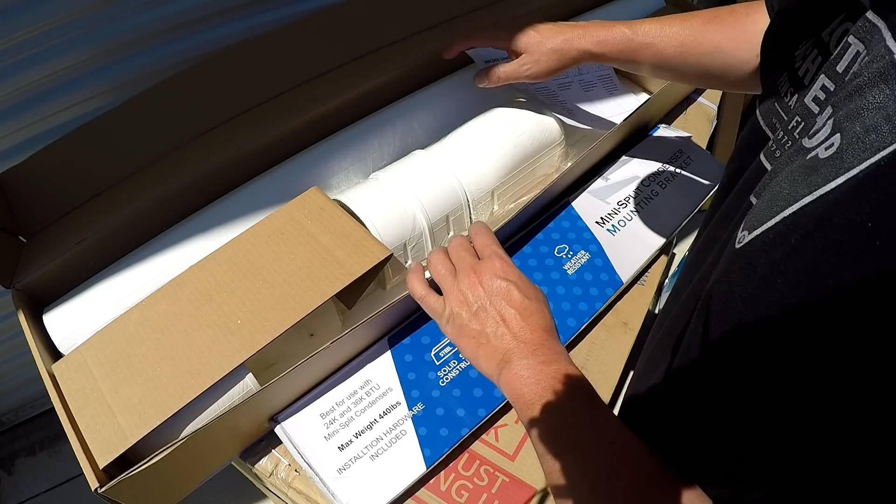All right, so let's go in here and check it out. So this is one of the pieces of the puzzle right here, the protective line kit. So this is a plastic kit that covers up the lines as they come out of the wall. Because of this kit right here, this may determine where I end up putting this outside unit on the wall. Got a couple 90s, so I'll look over these instructions. Well, this gives you all of your install instructions on how to properly put these guards on.

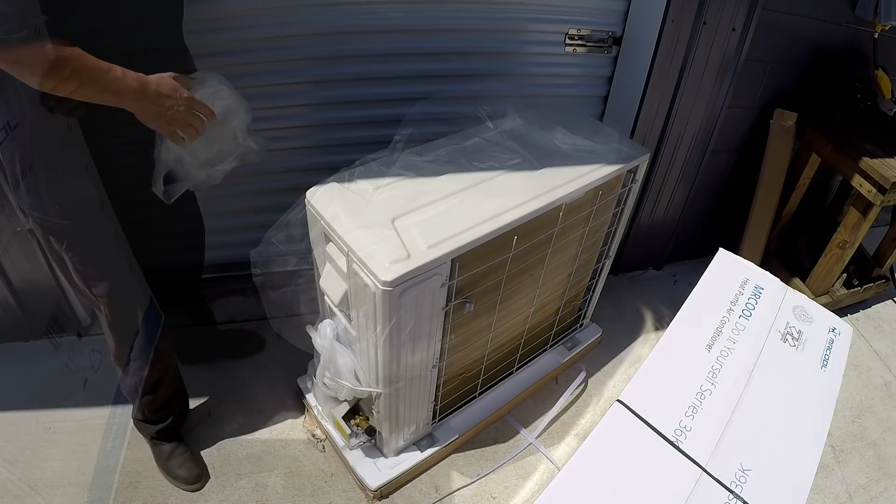All right, and then this is your condenser mounting brackets that I was talking about. These are the ones that are going to get mounted onto the wall outside, and then the condenser itself will sit on these brackets and keep it up off the ground. All right. It's a lot bigger than what I was picturing, but we went with the 36K, which was a big unit.

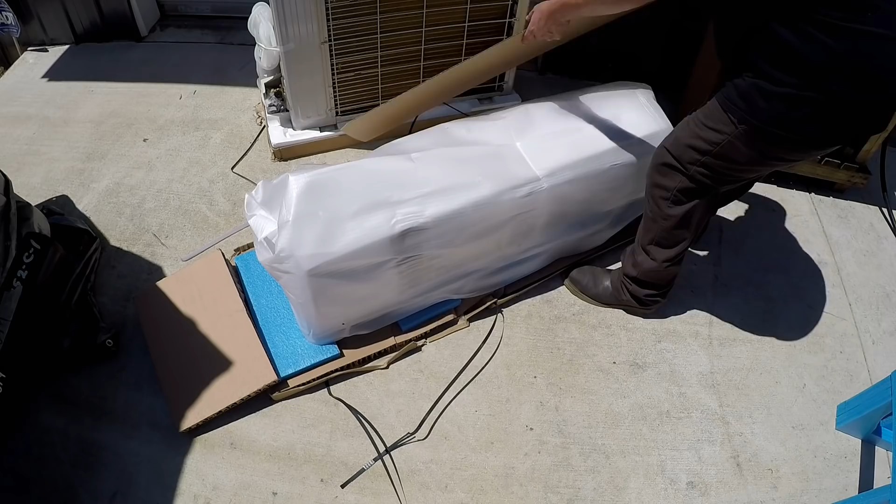All right, so this is going to be our template that we'll have to use on the wall for drilling our hole pattern, I believe, whenever we go to mount the bracket that hangs this system right here. This is the blower. So this is our template. We got to save this.

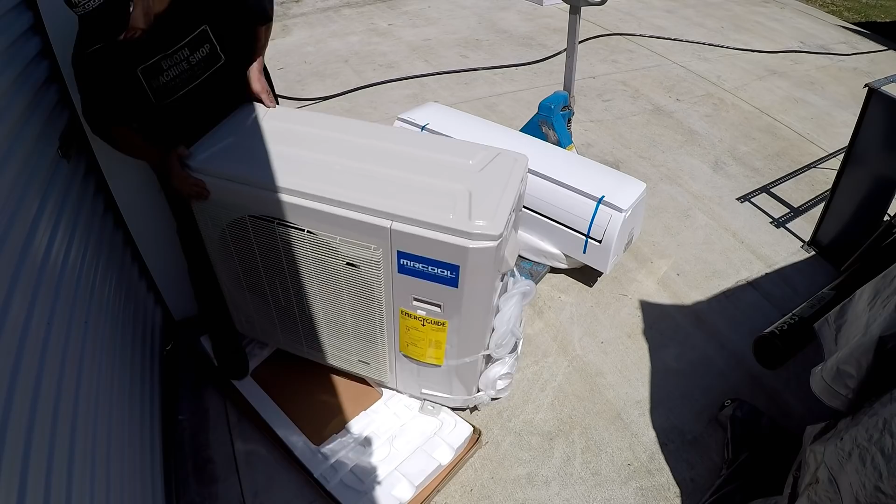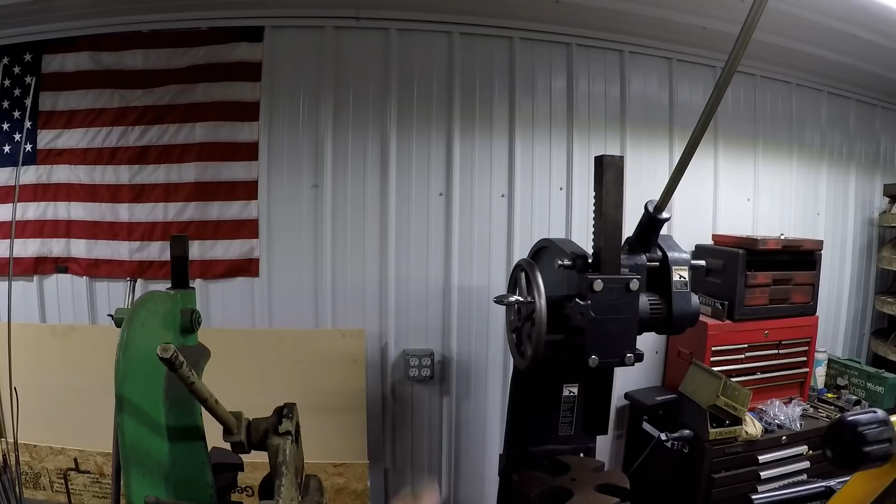Cool installed. All right, my breaker panel's right there, so we're going to tap into this and run a new circuit down the wall. And so this is a 50-foot wall down this side, and we're going to go approximately halfway down, which is going to be right about here where the Dake press is, right about in line, somewhere right here. We'll measure it out, it's going to be the halfway point, 25 foot.

So our blower unit, our fan, is going to be mounted right up here. We'll tuck it as far up as we can into this section right about here, and then we'll have to drill through the wall. I believe it's on the right side. We'll have to go through the wall to the outside. That's where the lines go.

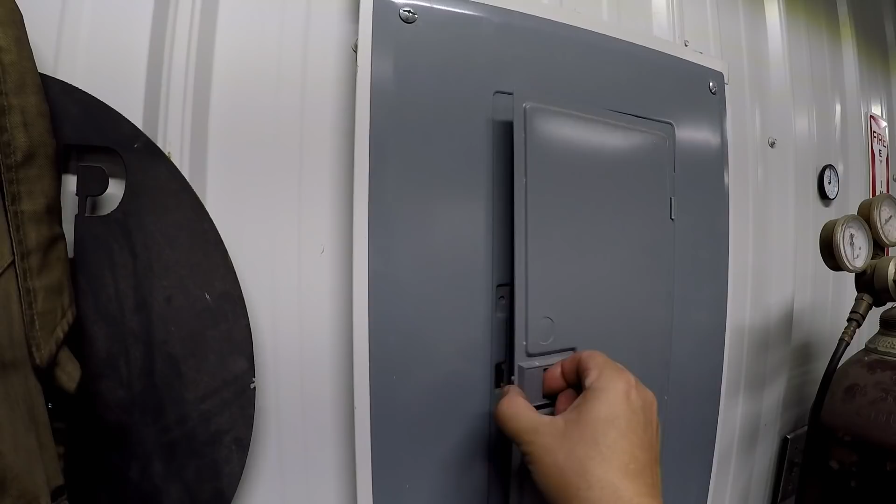All right, coming over here to the breaker. You can see we still got plenty of room, so we'll probably put the breaker in here somewhere. I believe it's going to be a 30 amp. We have to check, but I believe it's going to be a 30 amp breaker for a 240 volt.

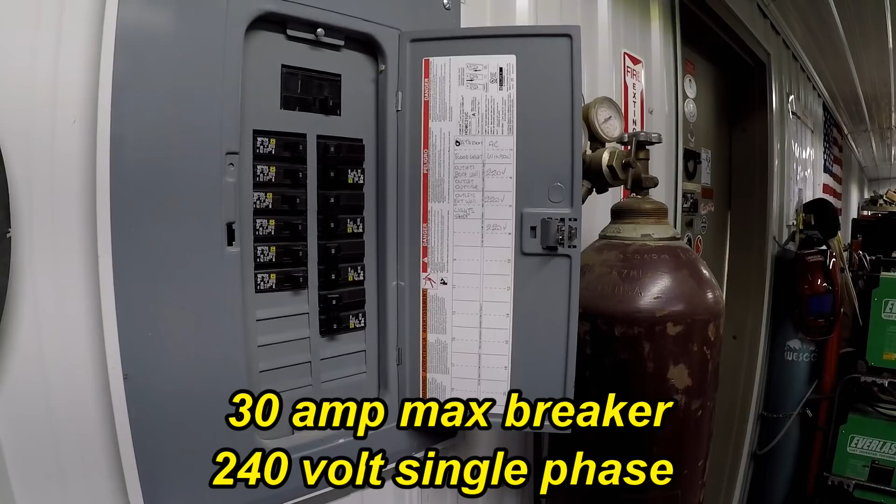And this is where I'm talking about you may have to hire a professional hand to come in and help you make sure that the proper breaker is installed and make sure that the proper circuit is installed and ran correctly so that you can plug the unit in.

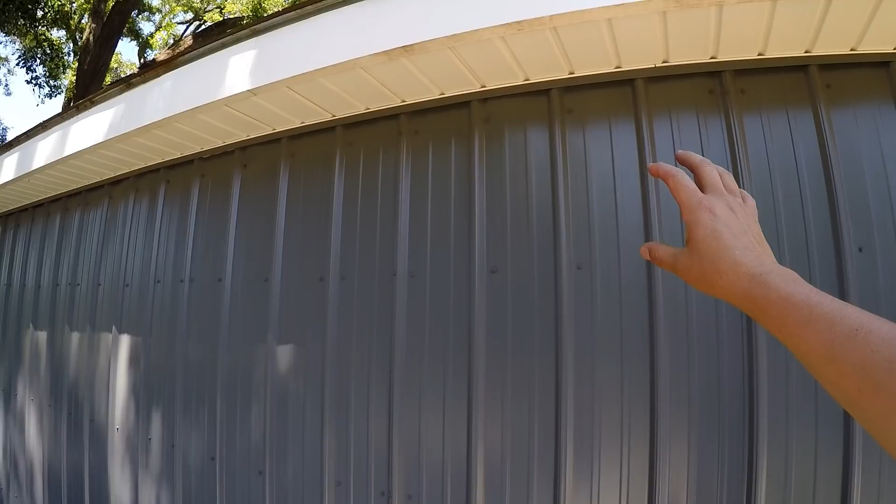So I believe the plan for Fernando is that he's going to come through the wall and he'll run the conduit up. We'll run it along the top corner there, down the wall, wherever we measure this out, we still got to measure it. And the condenser is going to be in this area somewhere right in here. I want it kind of hidden. This is the other slab where my garage is going to end up going, and I want it kind of hidden behind the garage when you're looking at this side of the shop here.

So the kit did come with the wall brackets. It's got two L-shaped brackets that we will mount on the wall, and the condenser will sit there on the brackets, keeping it up off the ground, keeping the dirt and the leaves and everything up off of it. So it'll mount right about in this area here somewhere.

So today's the day that we're going to get the Mr. Cool unit installed. I've got the template hung right up there on the wall. This is where the blower unit is going to sit, and we're going to start marking out a hole where we got to do some drilling.

So I actually have Fernando and his helper Tim here today. They're giving me a hand with this, and Fernando is an electrician and he actually does ACs for a living, so he knows how to do this stuff properly. But as I said before, this is a unit that anybody can install, but you may have to have some help with the electrical circuit, which is what Fernando is helping me with. But since they're here, it's going to be easier to have a couple extra sets of hands to put this kind of stuff up on the wall. But we're going to show you how all this goes, okay?

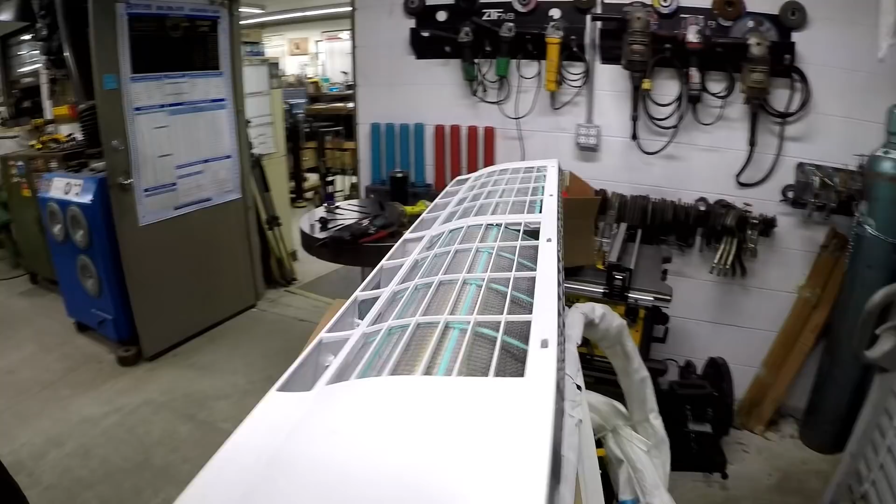So there's the unit down there. They've been checking it out, seeing what we got to do to get it hung. There's a look at the back of the unit there. These are the lines. So we figured out that we're going to have to drill our hole through the wall on this side. If you're looking at the panel, it's going to be on the left side. So we're going to do our drilling on that side right there, okay? And then this is the hanger bracket right here that mounts to the back of the unit.

And so they're working on a new circuit right now. You can see right there, they're going to be running a circuit out of this panel and going down the wall to power this unit up. And this is what I really needed help with, because I'm not an electrician. So this is Fernando's forte right here. All right, so we want to put a mark on the wall.

And by the way, this blower unit right here is halfway down my shop. So we got a 50-foot span of shop right here, and we're going to put it right in the middle, and the condenser unit will be on the other side of the wall outside.

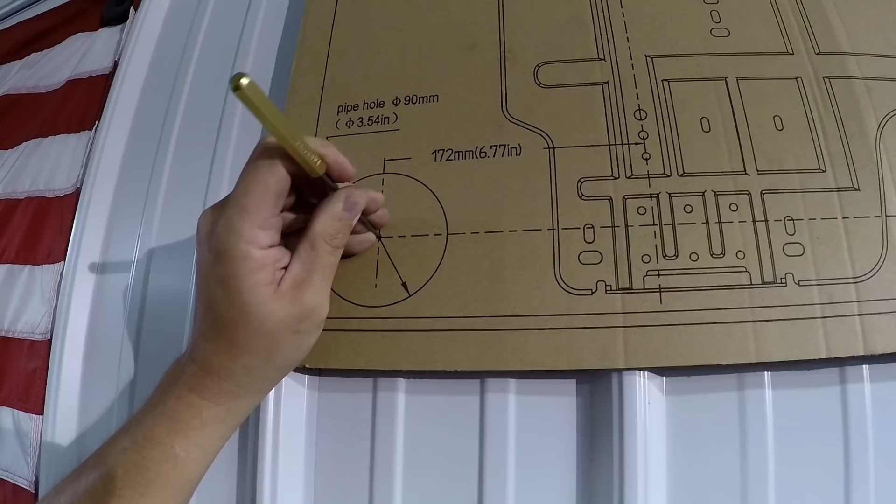So I'm going to take my ice pick here, my handy Duresta ice pick. This is going to be our hole for our coolant lines. This is the template, so you got to have a 3.5 inch hole saw. So I'm just going to go ahead and mark it. I'm going to go through right there, and I'm going to put a scratch right there on the wall. Just put a little scratch on the paint, and then we'll take a punch and actually punch that.

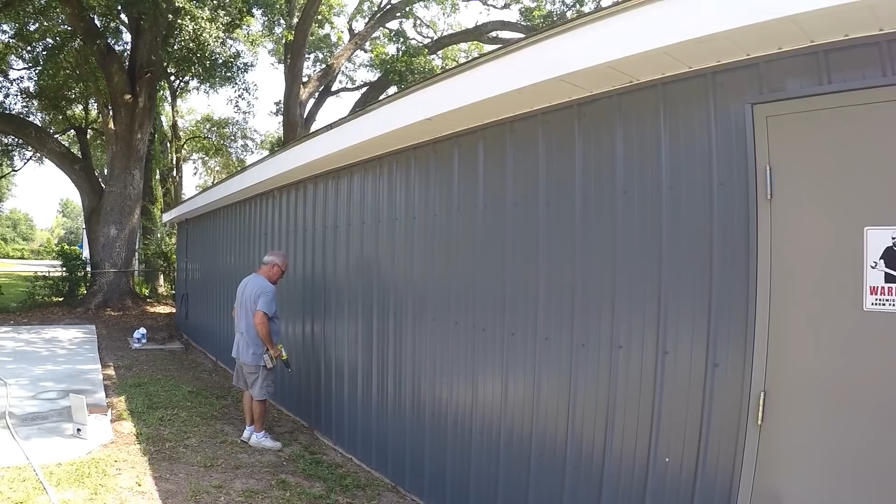So we got Fernando here. He's giving me a hand. He's getting ready to put a bend in that PVC right there. We got Tim here helping us as well. He's marking out some locations where we're going to be working down there to put our electrical system and our brackets to hang the condenser.

So is that a pilot hole? Yes, that's a pilot hole. That's so you can mark the outside wall there with where your hole is going to be? Yes, and it'll give us the center for our 3.5-inch hole here too.

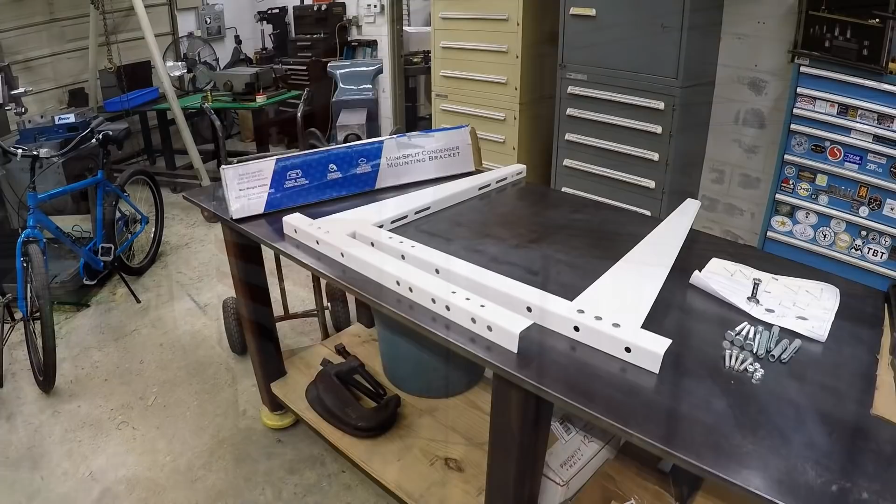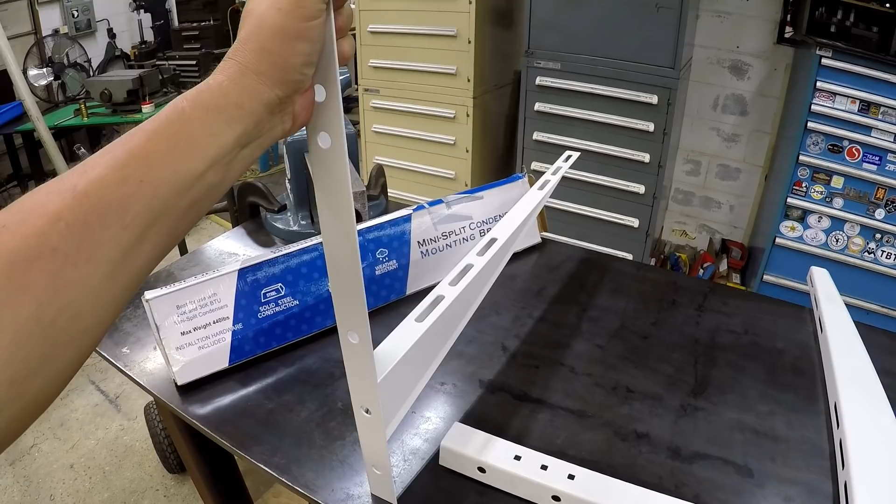Okay, cool. I've been working on the condenser mounting brackets right here. Just got these bolted together. All right. They will mount on the wall like this. Got a right and a left. Just got 3 bolts that hold it together there.

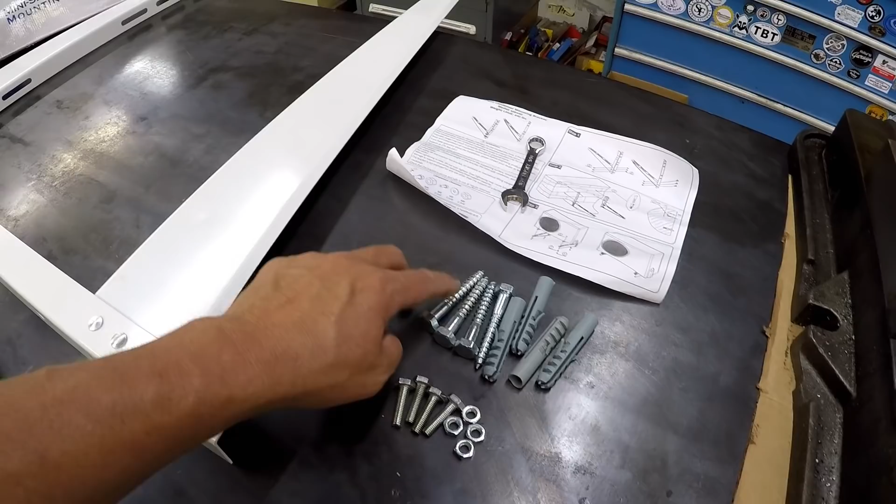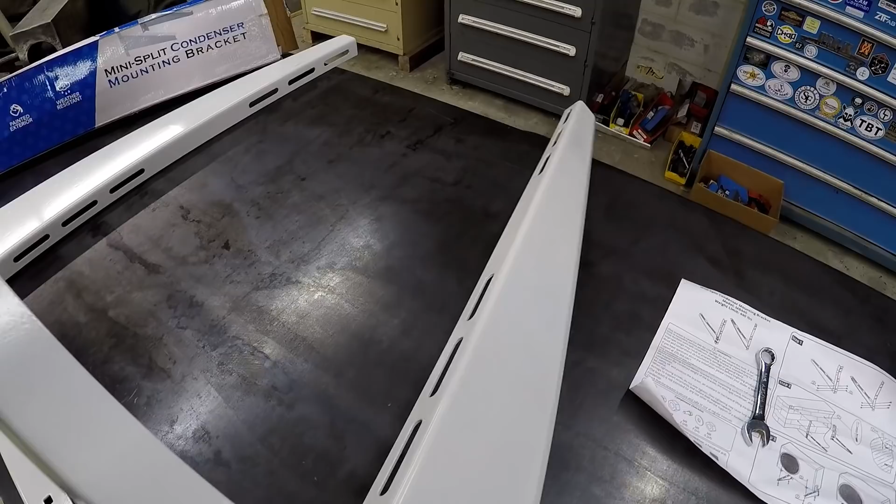So it comes with some instructions here on how to put it together and how to properly mount it to the wall. It comes with 4 lags. It's got anchors in case you need to mount that to a brick wall or some kind of masonry wall. And then these should be the bolts that actually mount the condenser to the bracket here. Okay.

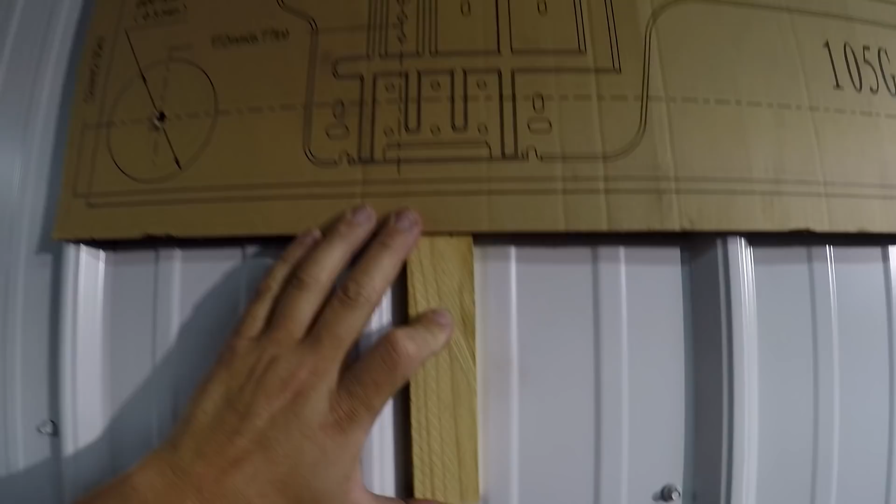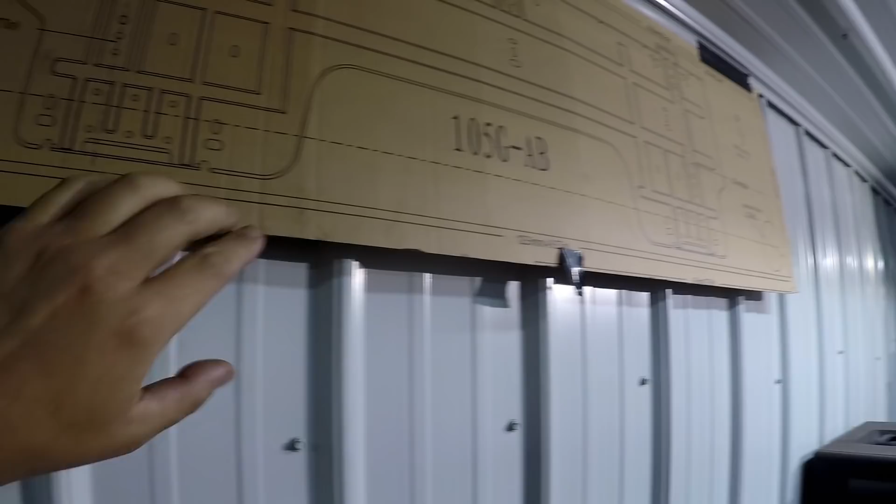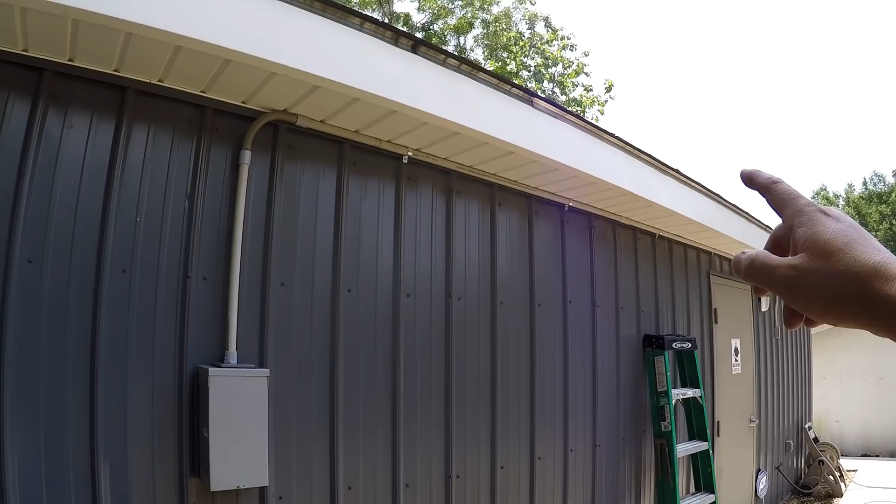These spacers that I just cut right here are going to go behind the bracket like this, so the bracket's going to be hanging there like that. These will be active spacers, because I'm on this corrugated metal wall, and all that's behind this wall is just the horizontal slats to hold the metal up. So we're going to be anchoring our bracket for the blower unit to these ribs here and holding it on that, and then we'll use the wood in 3 places as spacers to space it out against these ribs here.

All right, we're making some good progress getting the new circuit run outside here. We've got the PVC coming down, strapped to the wall there, and he's got 10 gauge wire installed for this circuit. Said that's good for 30 amps, and I believe the machine itself is going to draw 15 amps. This is going to be the disconnect right here, and the condenser is going to end up mounting right here on the wall.

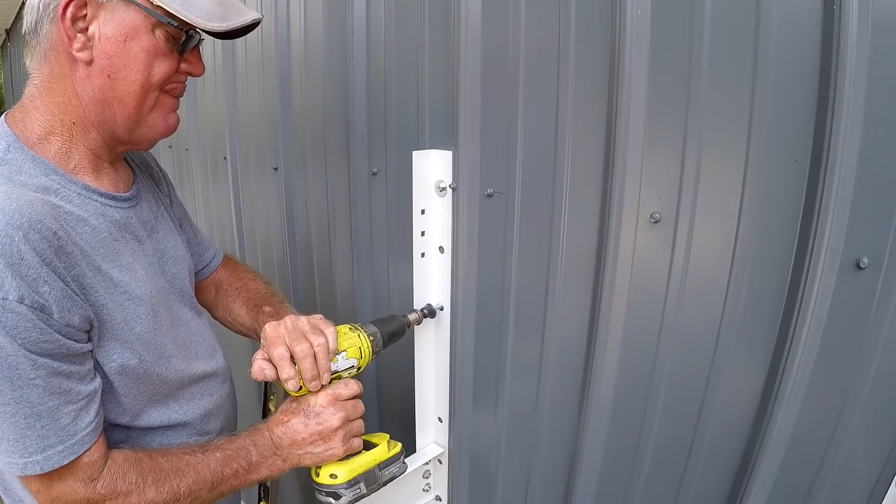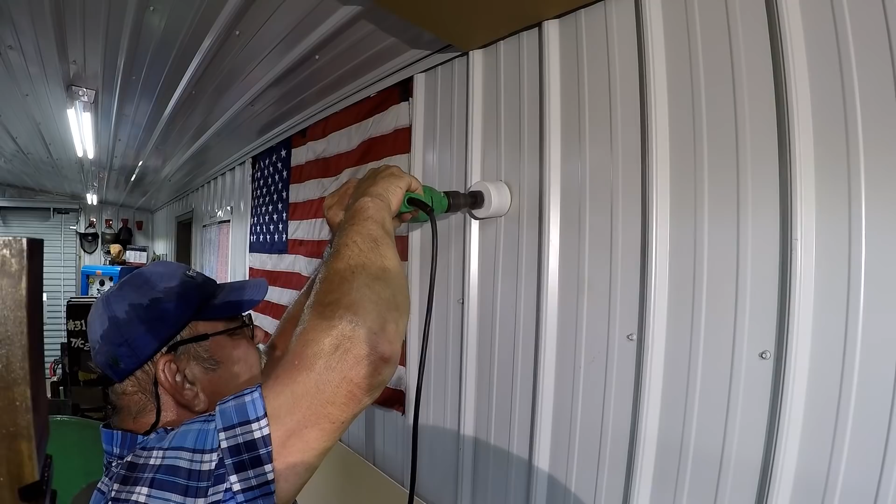All right, we're getting the wall brackets mounted now. Adam, you said you had a piece that went through here, like a sleeve? Yes, there is a sleeve that goes through the wall too. We'll check that out. It should be in the box behind us over here. Okay.

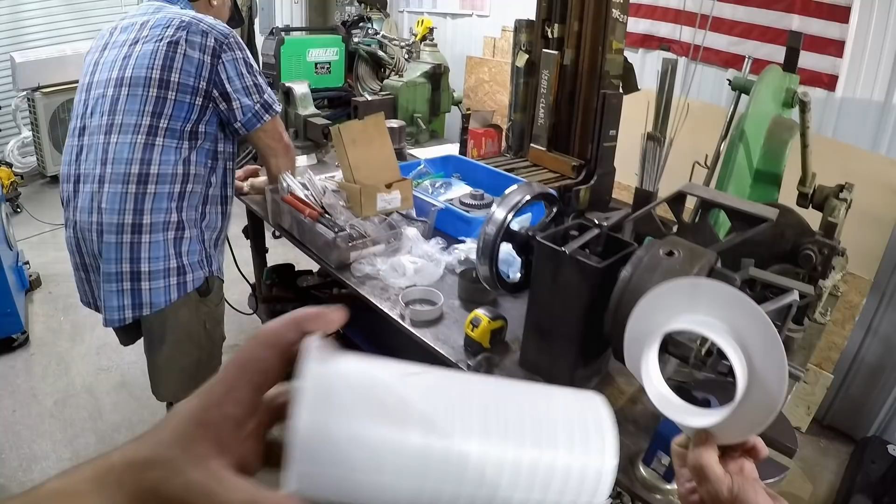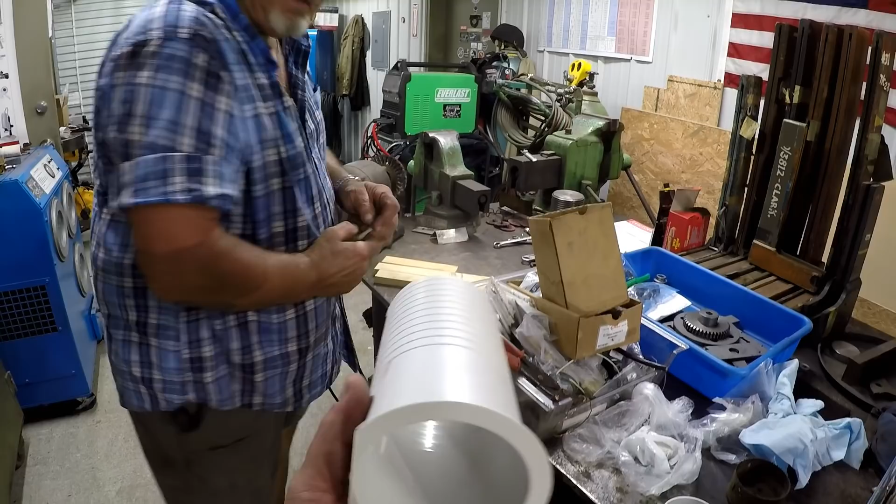That'll work right there. So this is the sleeve, and then the outer flange that goes through the hole up there. So we just trimmed it, we cut a section off, we stuck it through, measured where we needed to cut it off, and we're getting ready to install this into the hole there. And Fernando, what is that you got there? Is that some kind of sealer that's going to go around this? It's a sealer, and we're going to put it right around the flange. Okay. And once we push this in, it's going to seat right in the hole. All right, here we go.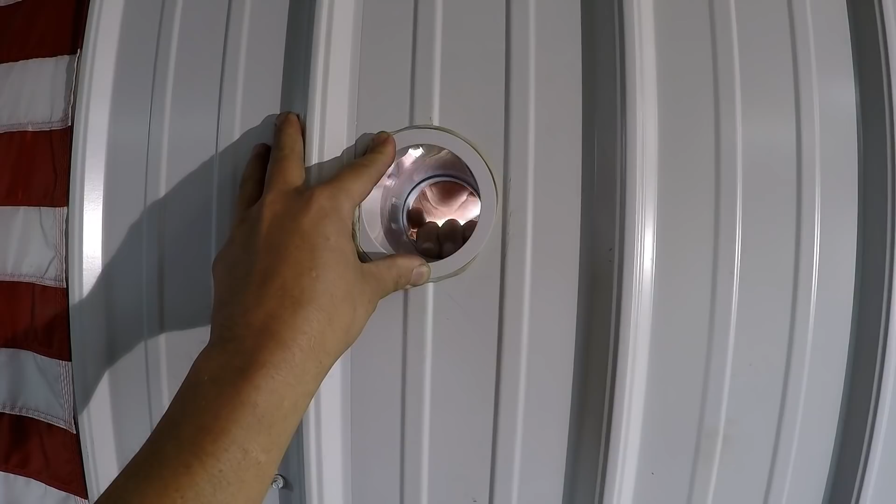We're going to install this sleeve right here. Make sure that the putty's on the flange there. Tim, go outside. All right. We got it all the way through there. Okay, there we go. Now I'll hold this while they put the other flange on the other side there. He's putting the flange on the outside there now. All right, he's got that on.

Good, Adam. Here's the one on the outside we just installed. We had to trim a little bit of that flange there just so it would go up against this rib.

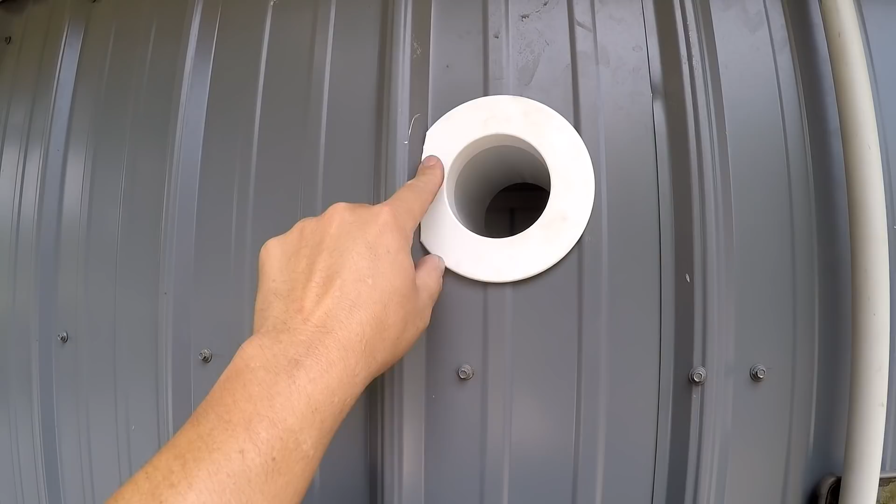So you've got screws in all the ribs there. Yep. Really holding that bracket, feels pretty solid up there, don't it? Absolutely. The whole wall. Yeah, I'm happy. Okay, but we're gonna do this. It's really sturdy, you know what I mean? Yeah. Okay. It won't flex.

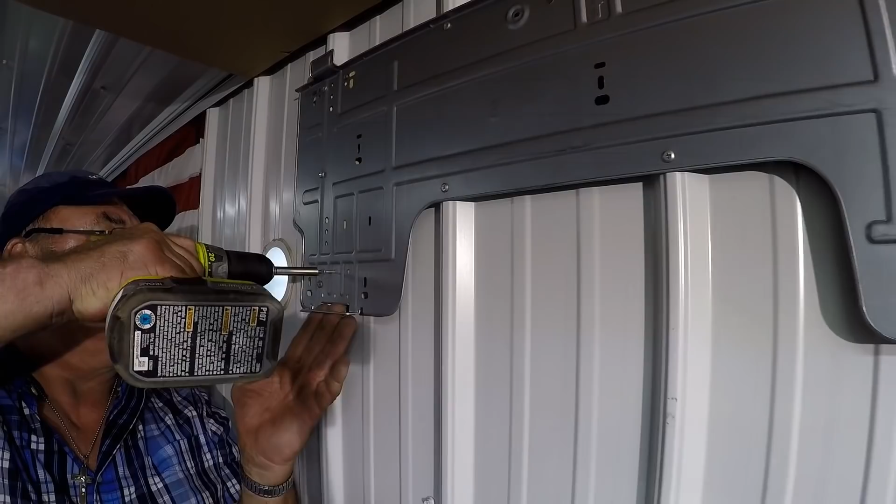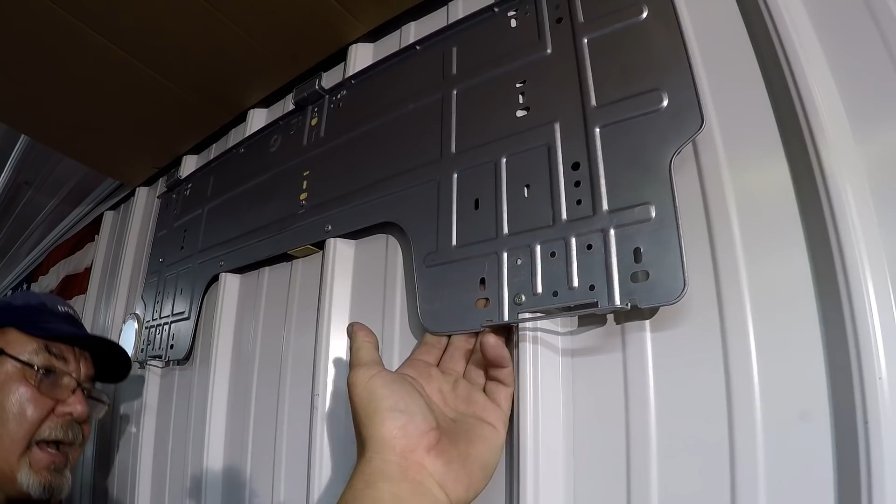There we go. All right. And we got one more we're gonna put right here. Also another inch-and-a-half, then another short self-tapper up top. Yeah, we'll put another screw up there too. You ain't going nowhere. We're going to start feeding the lines through the hole and get those going out there before we hang the blower unit here.

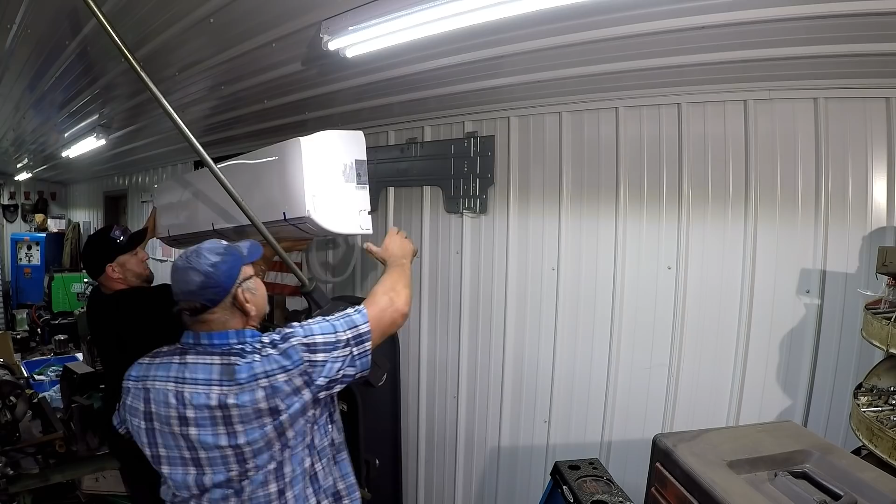Okay. Because we got to bring that end up around there, don't we? Yeah. Okay. Pull it, Tim. Easy now. All right, get the drain. Whoa, whoa. No, pull the drain. Pull the drain. Drain line. There you go. I got mine right here. All right.

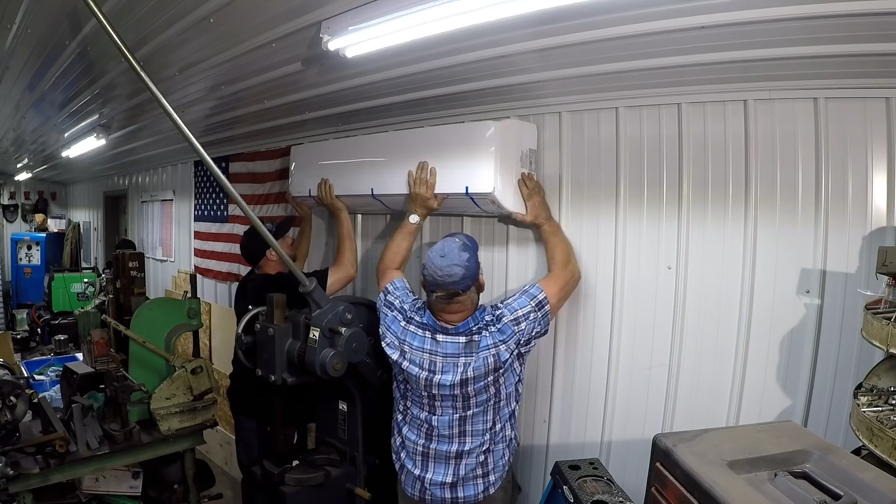Now we have to lay this under there and then put the unit right there. Just hold it. Hold it, Tim. I think you're hooked up there, aren't you? Yeah, I am. Okay. Does that snap in down there? It does. I just didn't want to give it that final push yet. Okay. But I think we're okay. All right, we got the blower unit installed. Lines are right there going through the wall. So we're going to go ahead and start on the outside.

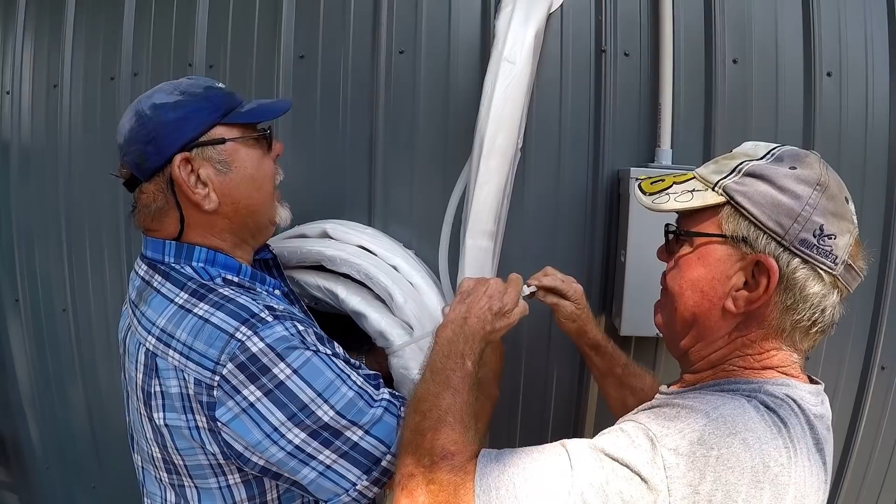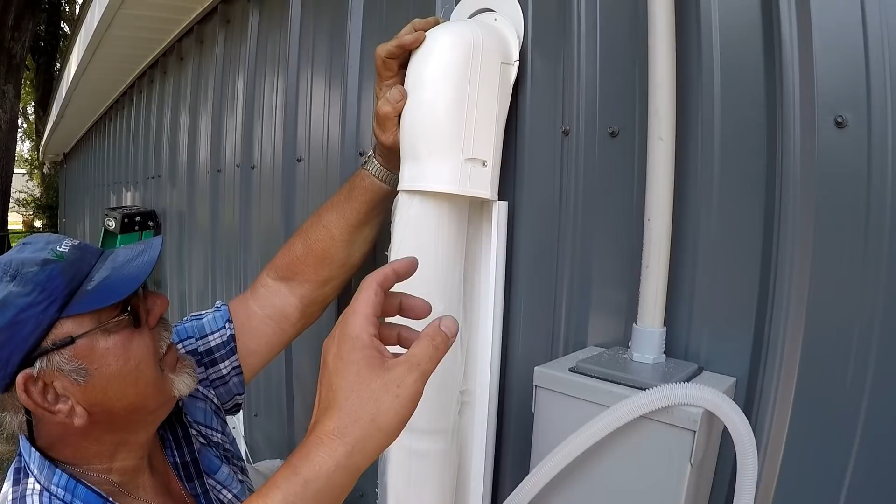So we're going to take the extra line there and we're just coiling it up, and this is going to be right behind the condenser here. And then the ends of the lines are going to connect right here. All right, we're installing a little bit of the line guard system now. We got the elbow that's going to be mounted up here where the lines come out, and then we'll have a little shoot of it coming down right here to protect the coils just down to where the condenser is mounted. There it is.

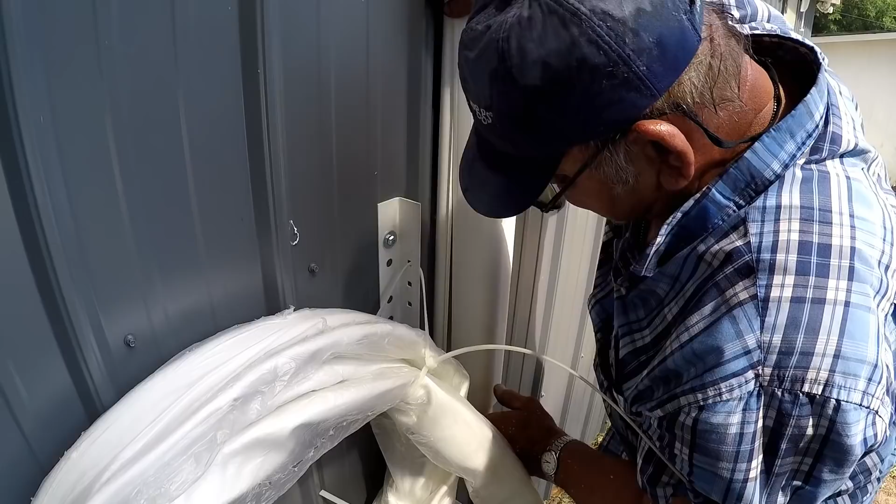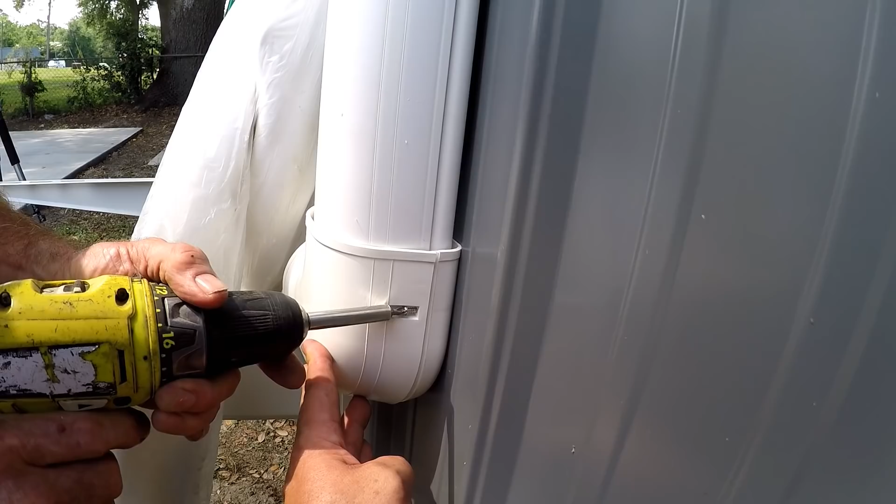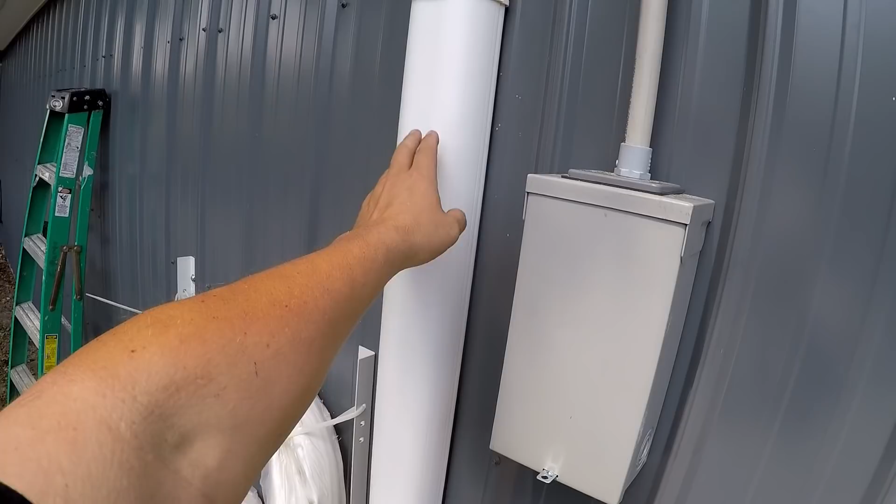Okay. All right, there's our line guard kit that we installed, and you could just trim this. That's what we had to do. We had to cut this piece to get it to where we want. Use the one at the top there, the 90, and then we also got an elbow right there. But you got a whole kit here with plenty of run to completely cover up that entire line if you wanted to run it down the wall.

So here's your lines. Here's the line set. And yeah, I thought we were going to have to look up the wiring diagram, but it's got a receptacle built into it. You just plug it in. Okay. It's pretty much idiot proof. This is obviously going to power the blower unit inside? Yes. Okay. It gives you your heat pump option for heating and cooling.

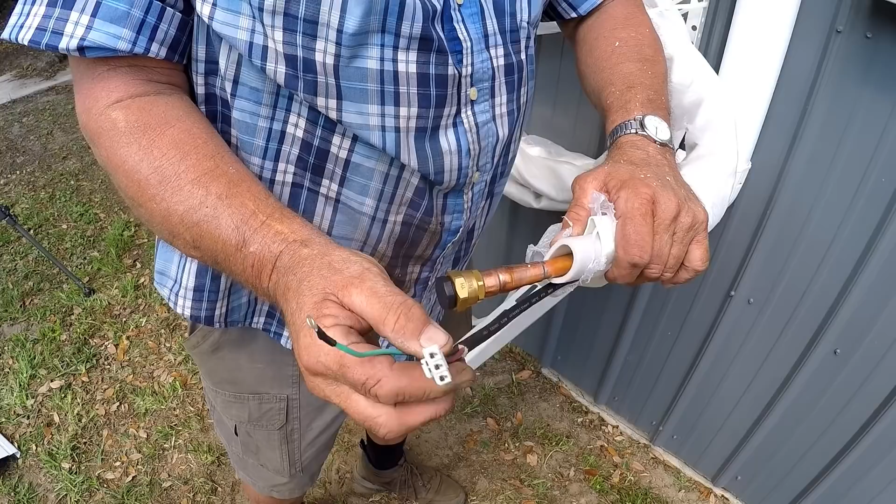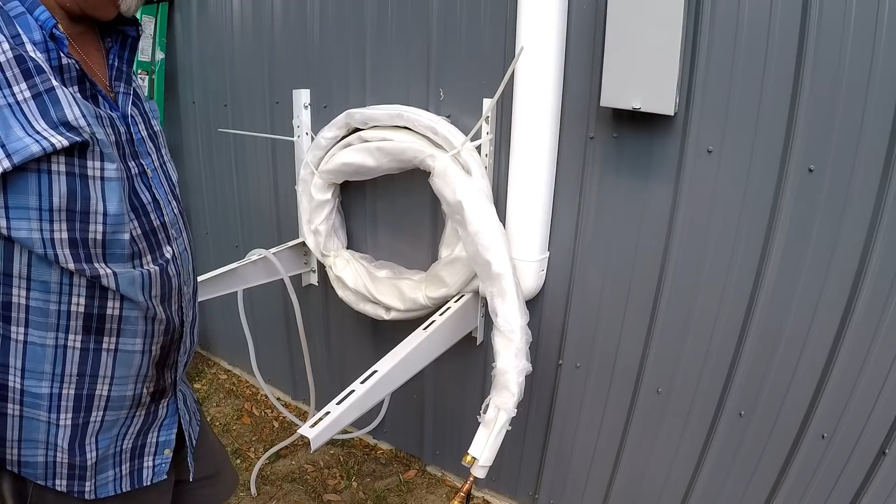Yeah. And then these are your two copper lines, and they're nice and flexible too. I've never seen any refrigerant lines this flexible. Huh. Just cool. Just a little FYI. All right, yeah, so we're on the last stage of this. So now we're ready to go ahead and set the condenser up here? Yes, we are. All right.

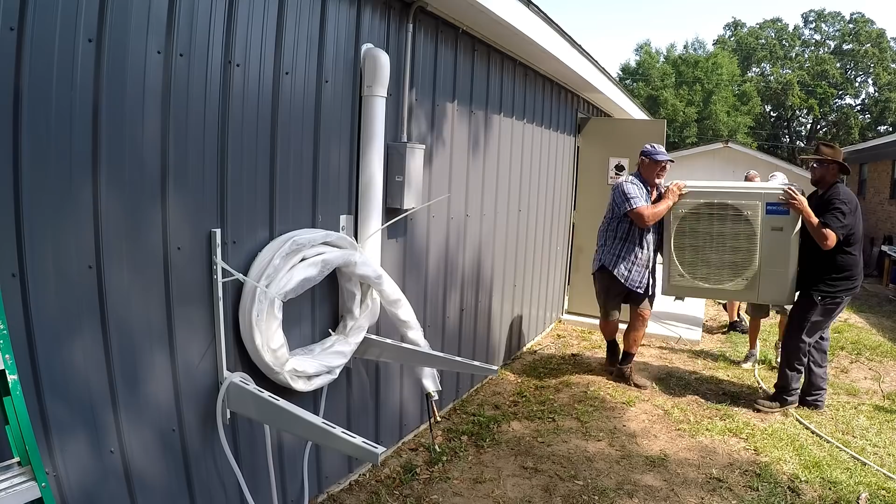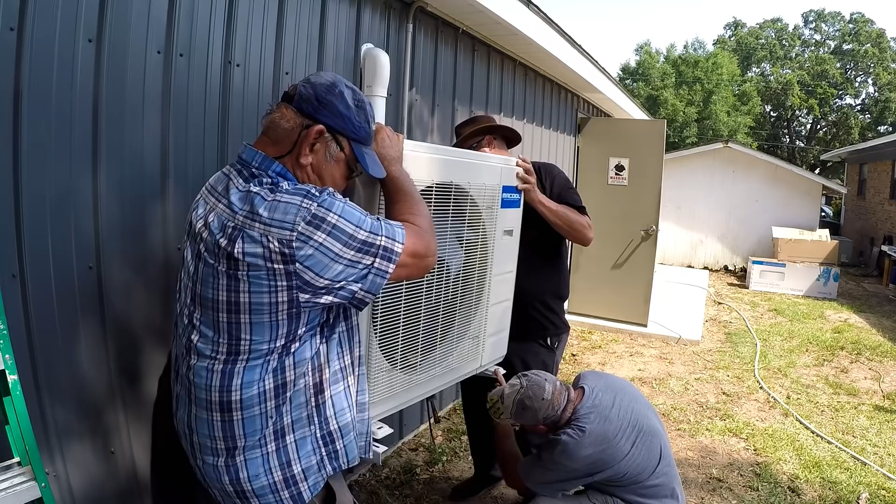You gotta go. Yeah, you're right. It's been a long time. Boy. Okay. All right, Tim. All right, you gotta line it up now. Wait a minute. Okay, come to you. There, right there. Hold there. That's okay. Adam, you go there. Just set it down? Yeah. You're barely on it now. Okay. Yeah, just like that.

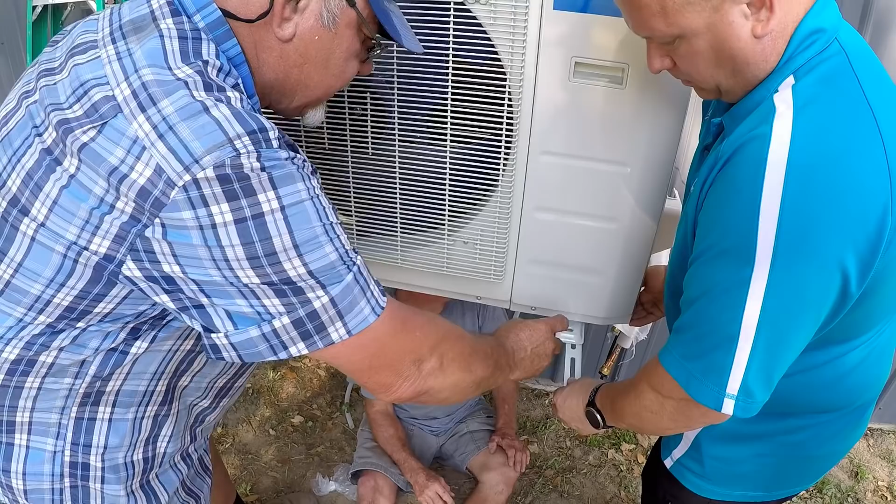No, I got this one right. Okay. We can get a bolt in there, we're good. I think I got it backwards. All right. There's your bolt there. Okay. Fernando, there's your bolt there. Let's go ahead. We'll be okay, Tim. All right, bud. We ain't going anywhere. There you go. Go ahead.

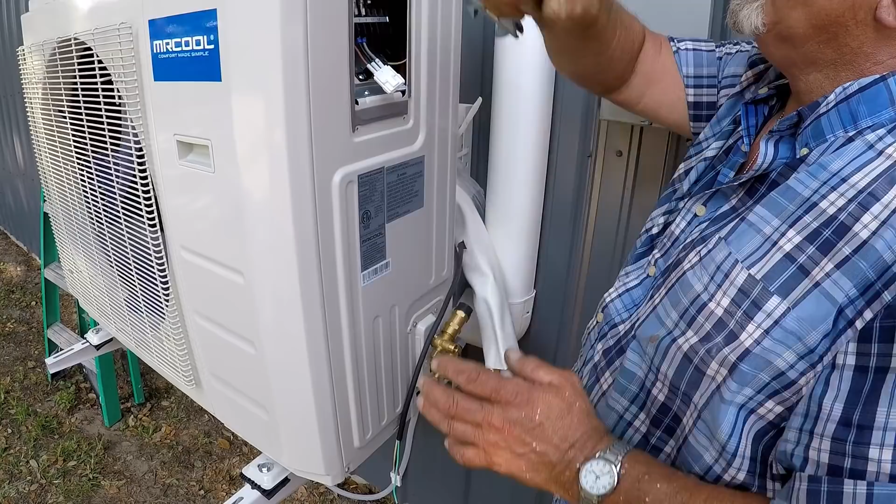Pretty good. We're going to go ahead and start the install of the lines now. We'll go over a couple things that we need to know. This being a do-it-yourself kit, whoever's installing this should be able to handle this themselves. I will mention that the kit did come with an Allen wrench, but Fernando's got his own tools that he is using. So what are we doing right here, Fernando?

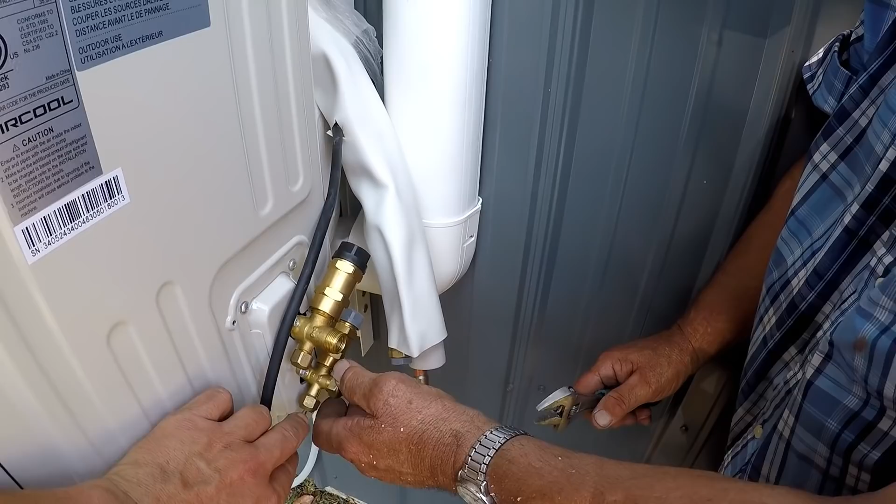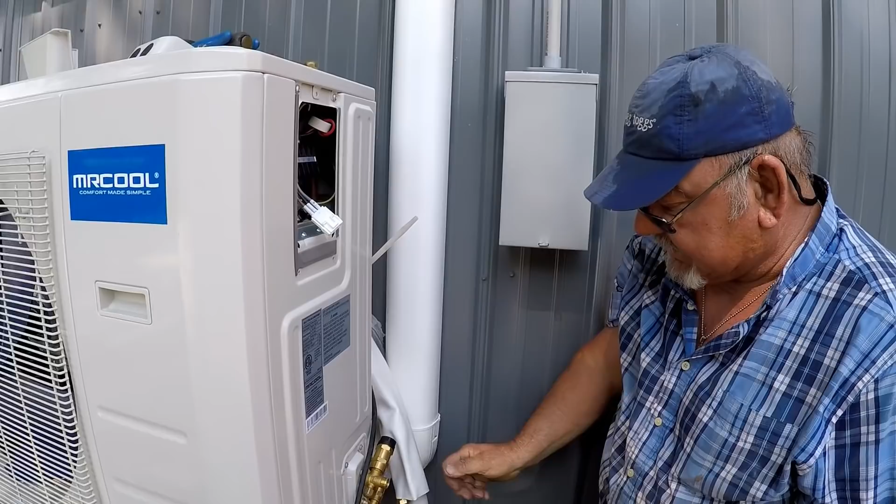We're taking off the caps to the valve bodies themselves where the Allen wrench gets inserted. Okay. To open up the valve. This is where the Allen wrench goes? That's where the Allen wrench goes, that's right. Okay. And we're not going to do anything more than that now. I just like to take all my caps off first before I start.

I'll take these plastic safety covers off of these lines. We've got another set on the female ends here, and they're color coded and sized differently, so you can't hook up the wrong one to the wrong valve. No, sir, you cannot. Okay. Not hook up the wrong one to the wrong valve.

So here we're gonna line that up. These are sealed lines. You have to line them up real good and put them on with your fingers. Don't force them on with wrenches. Right. You don't want to cross thread that, because then you're screwed. You're screwed. That's right. Now we've got another one here, the big one.

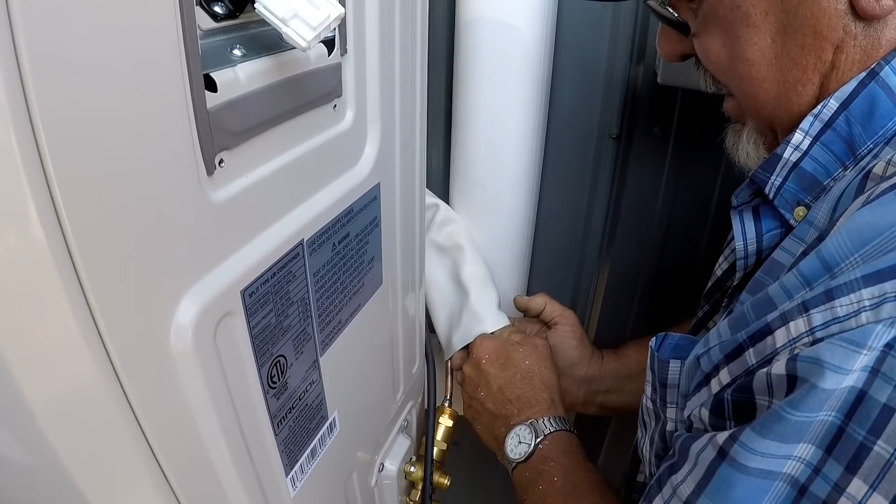I will say that he made a little modification too, because you've got a power cable right here that's going to plug in there. Yes. And that was going to be hard to get coming out the end, so he cut a little slit there and just pulled it out there. Absolutely. I just wanted to bring that up since that's something that he did. Absolutely. You might have to use a little bit of finesse to get it where you want it. Yep.

There we go. Now we're coming. Now I'm a little off here, but she's coming. Yeah. Seems to be it. Okay. Do the same thing for the small line, yeah. So what are the two lines for? These are for the refrigerant circuit. One line goes into the evaporator, and another one comes back out. Okay. It's got to have a pair of them to make a complete circuit.

All right, so you got the two lines connected and seated up good? Absolutely, and they're good and tight, so that part of the operation's done. Now to complete the refrigeration part of it, we're going to back these two valves out. Okay. And the wrench that's provided will fit right in here. I've got my own little ratchet. And then we just break the seal, and there you go. You can hear it rushing in. Yeah, so that let the refrigerant into the line? Into the lines, absolutely. Okay. That was one. Now we got the second one. That was it, actually. I just got to get that one out. Okay. So that completes that.

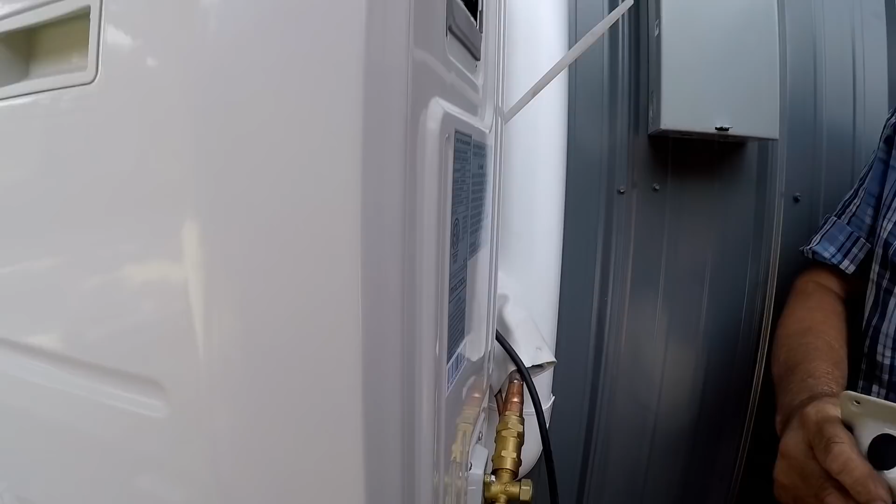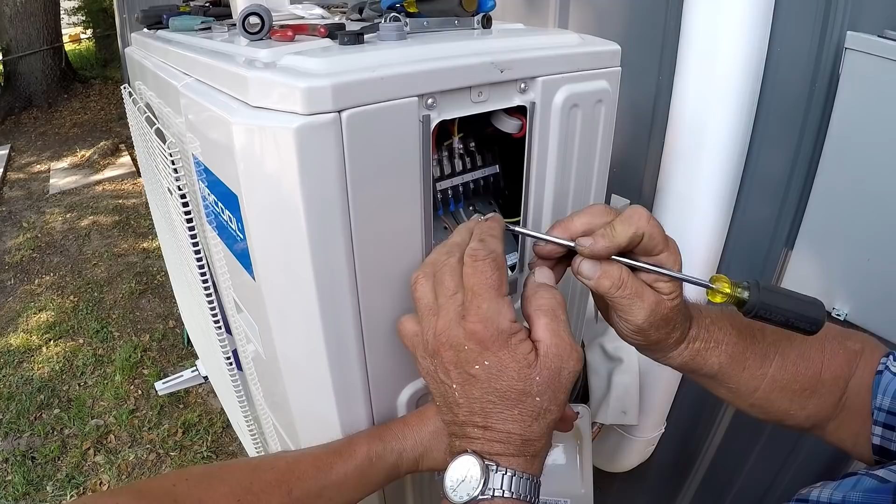Okay. All right. So I guess from here, the next thing we got to do is hook in our electrical wiring right there. That's right. So you got a ground. We've got a ground that goes to a ground screw right there, which we'll back out, and this is a one-way plug. It can't go in and work but one way. All right. And that's it. We've got to finish putting the power to it from the wall disconnect to the unit. Okay. I'll hold that. We're just getting ready to hook in the ground wire now. We'll go this side with that. It's coming in on that side. Good. Okay. You can let that hang then. Then we'll go ahead and plug in.

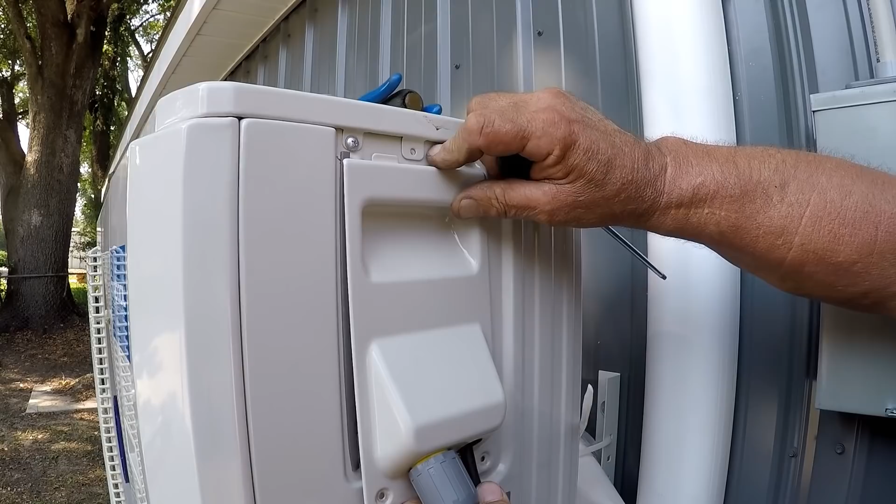All right. We're still going to bring the power in right now. We did feed this through this cover plate. Yeah. I just wanted to point that out. Absolutely. And we've got a grommet that's going to go in there in a minute. And then he just put this fitting in here. This is going to be for the wire that's going to go to the disconnect there. Yes. Fernando's outside hooking up the unit, doing the main power.

So I went ahead and installed this right here. This is going to be the thermostat and the remote control to control the unit. This is just a little bracket that you can mount anywhere you want. So I decided to put it right here, right by the door and the light switch, and that's where that'll stay. But you can pull it out so that whenever we're ready to power it up or control it, we'll probably have to walk right over here and point it to control the unit there. So we got its home. It's going to stay right there.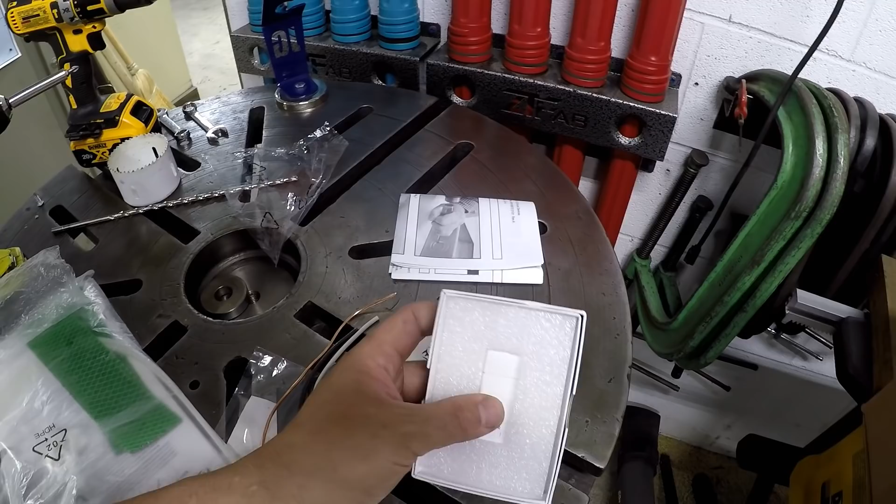But there's also another kit that I've got to learn about. I don't know yet, but it comes with this. It's like a USB, like a little thumb drive, and it says Wi-Fi kit mobile app user manual. So I know that you can actually control this unit from your smartphone as well. So I'm going to have to figure that out later on. We just want to finish getting this thing hooked up and get it powered up and operating.

All right, guys, we have got the MRCOOL AC unit installed, and it is running, and it's doing great. This thing is very, very quiet. You can hardly hear it running. I've got it on max fan speed right now.

You can see you got the LED kind of coming through the cover here. That's what I've got it set on. I've got it turned down just so that I know that it was going to be running and putting out some cold air for a little bit. So I'll get you in there. You can probably hear it now.

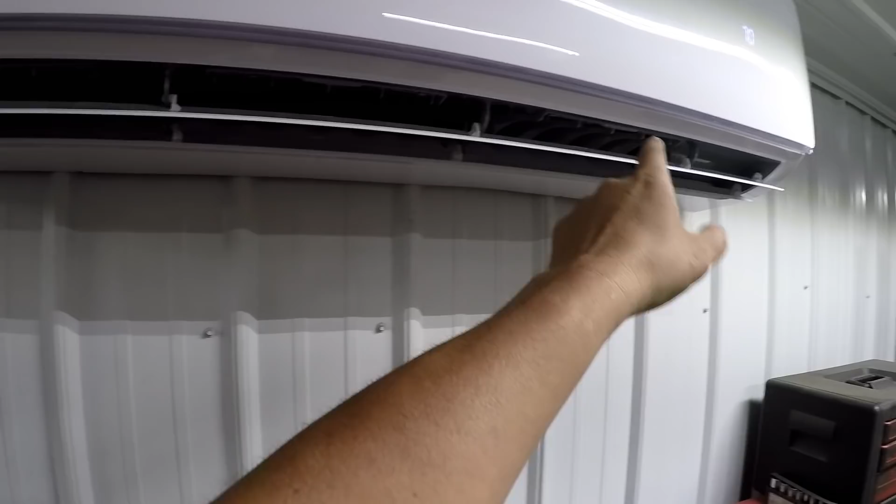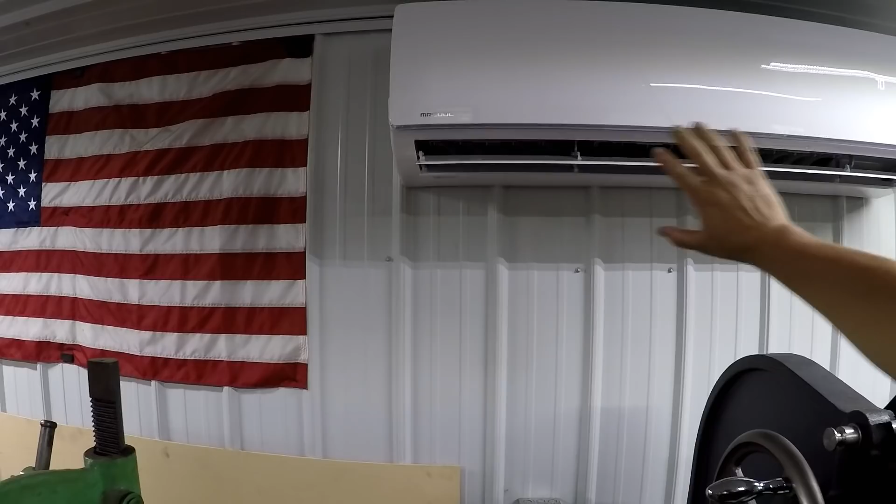You can adjust these louvers inside here to point, you know, which direction you want the air to blow. And it's blowing nice and cold. This is nice, cool air coming out of that unit right there. It feels great, but it is very, very quiet.

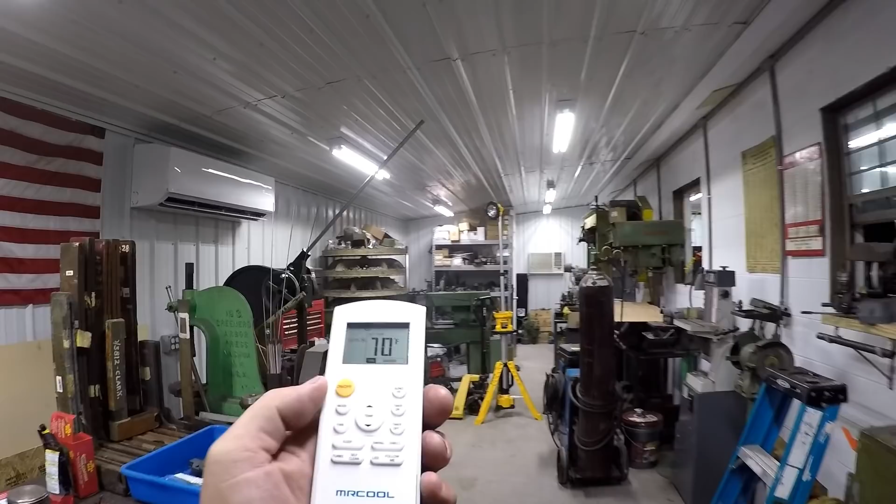So we've got our control, our thermostat, and our remote right here. I've got to do some more research on what all these different commands are for, but I do know how to turn it on and off, adjust the temperature right here. If you'll look up there, 69, 70. All right, and then you've got fan speed here as well.

So we'll put it down on, so there's low. That's all the way down on low. It's still blowing air. You can't even hear it running. So it's doing great. It's doing really good. I'm gonna go ahead and kick it back up here to high speed.

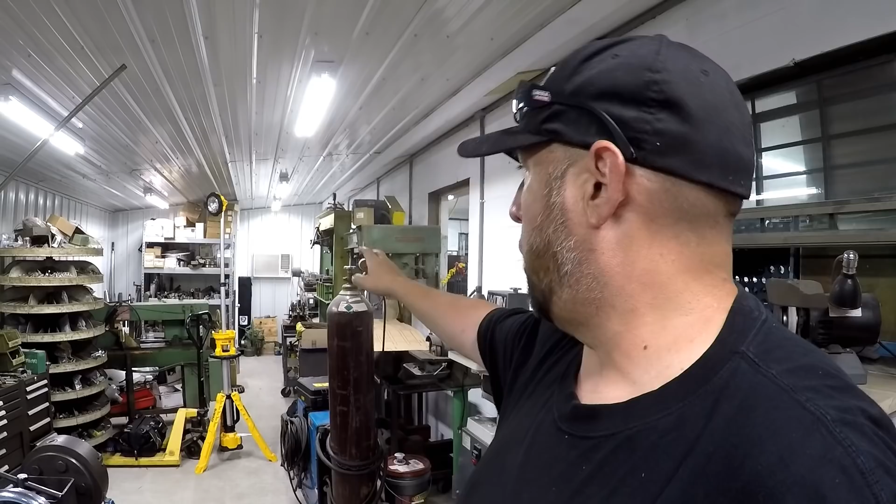All right, I'm gonna keep it turned down a little bit and see how it does on cooling this area of the shop. As I said, we've got the window unit down there that I've had installed, and it's always kept it kind of cool in this part of the shop, but I don't think it's going to do near as good as that MRCOOL unit right there. So let's go outside and we'll check out the AC condenser out there, okay?

I'm gonna go ahead and put the thermostat back on my bracket right there. So there's the complete install right there. I do have some traffic noise out here, and I've got a neighbor with the lawnmower running, but I'm very surprised at how quiet this unit is as well. You can barely hear this thing running. It's not like a typical AC unit that you would hear hooked up to your house, which is very surprising because this is a 3-ton unit.

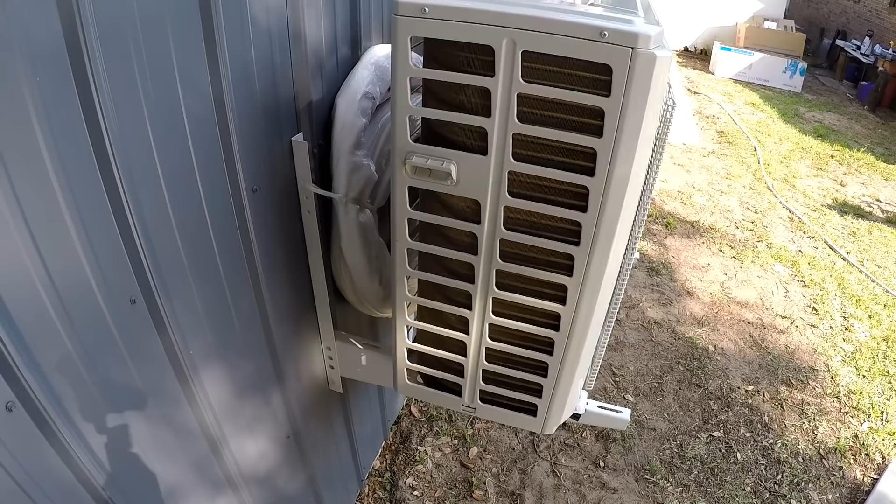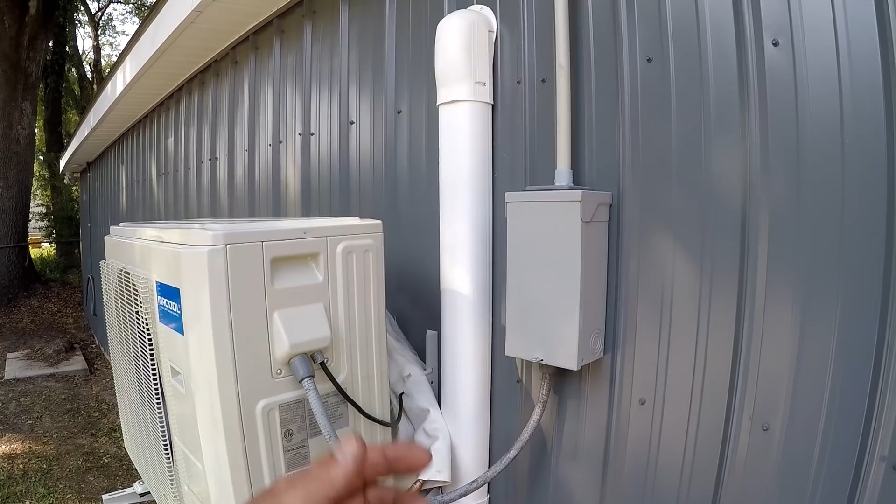So there's all of our extra line coiled up nice behind the unit right here. We've got it zip tied to the wall, so it's not going to go anywhere. Fernando did a nice job hooking the electronics up, the wiring like we should. This is our disconnect right there. It's sealed up here for the weather.

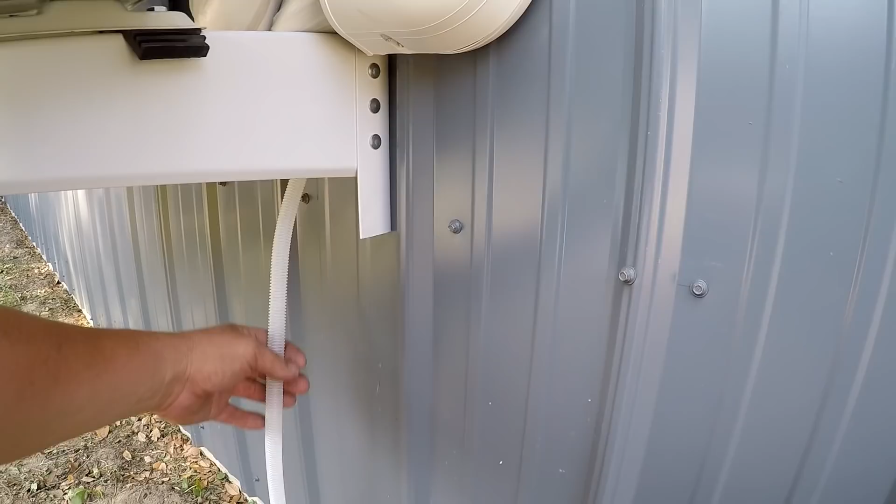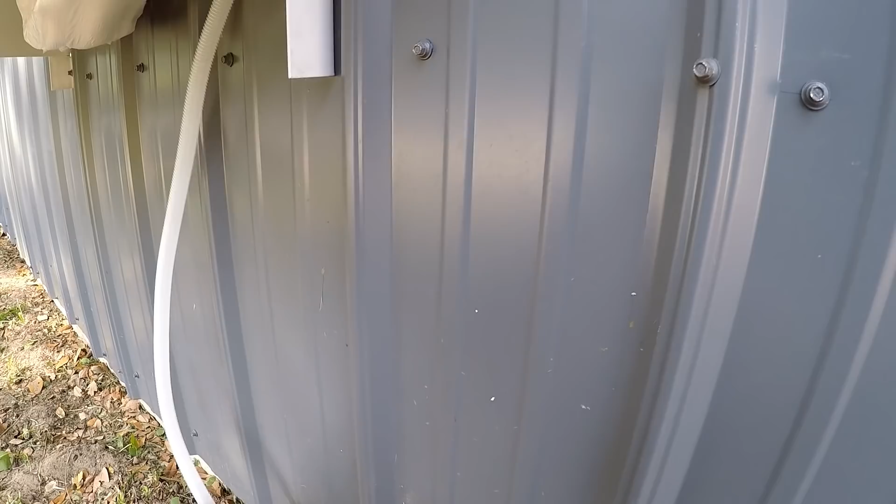Now there is one thing that I'm going to have to do right here. This is the drain. This just comes out of the line kit right there. So I'm going to modify this, and I'm going to hook this to a piece of PVC and mount this right here on the wall so that this isn't just hanging out there. I need this protected some. I wasn't prepared for that, so I'm going to do that off camera, but just know that you may have to do something for your drain line after you install it.

So it looks good. It looks good out here. I'm probably going to cut these off as well, the brackets, just so that there's not so much hanging out. Looking real good.

All you guys out there that's got shops that's hotter than the blazing sun, looking for some cooling action, you might want to consider one of these. Check out the MrCool units. They build these in different sizes depending on your needs, your different square footage. This one is the 36K, and you should be able to do all this yourself. Maybe have somebody help you pick this kind of stuff up and get it hung, and besides that, have a professional help you with the electrical system.

I always have to have help with my electrical around here, and I was very thankful that I had Fernando and Tim that came and helped me get the circuit run for this unit, and it looks like a nice professional job, so I'm very happy with it. So really looking forward to having this now that summer's here. It's about 98 degrees outside, and it's already feeling nice and cool right up in here, thanks to MrCool.